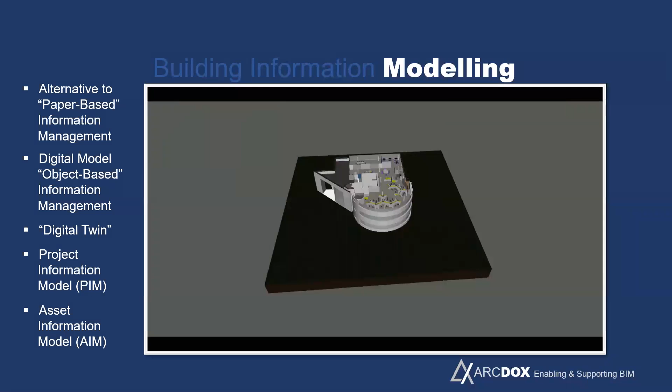So we move on to the next acronym in BIM, modeling. What is this to us? It's the ability to use 3D intelligent objects to build your 3D virtual model, a digital representation of the physical. So the 3D model we have in front of us right now drives the production of your 2D drawings.

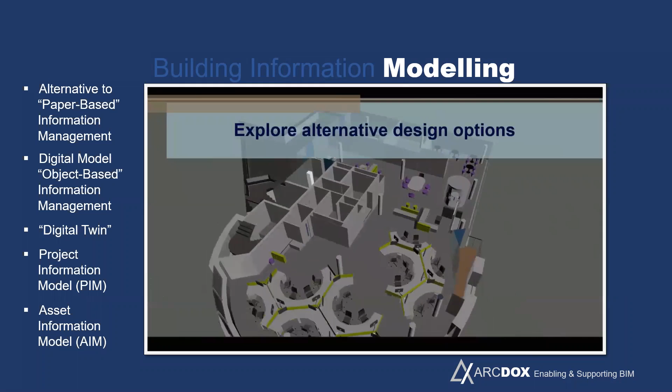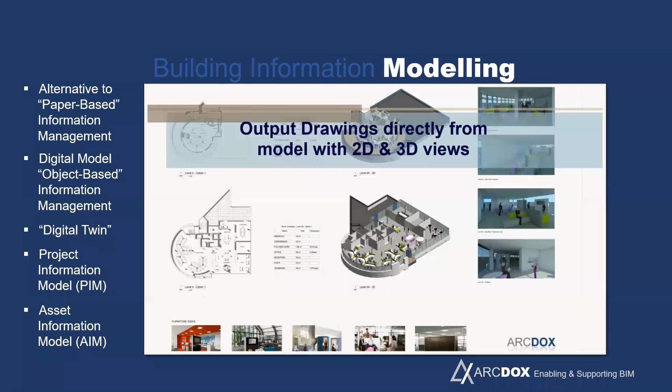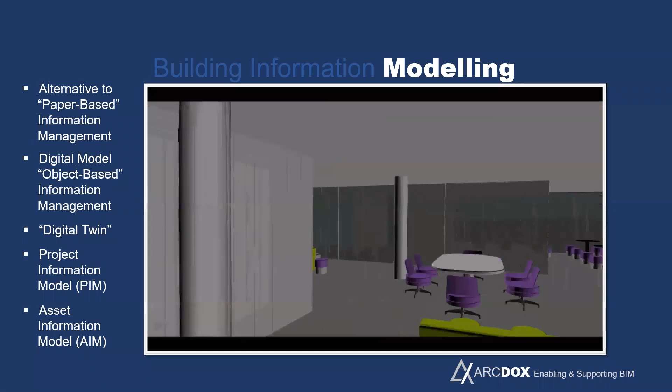It has so many uses. You can exploit it for design options, and for a higher level of communication and collaboration in this environment. These can be called paper-based alternatives to paper-based information management, digital model object-based information, digital twin, project information model at capital delivery phase, and asset information model at operational stage. So it's for better communication and better decision making.

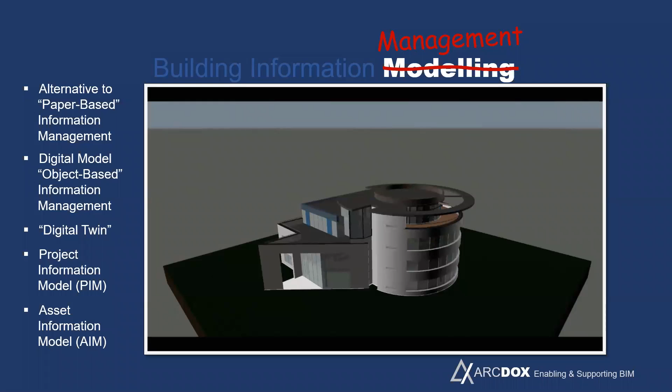The ability to interchange those two words, management sometimes for modeling, is because we want everybody to be able to identify with the BIM process. Taking a construction manager or a quantity surveyor, for instance, they might say, oh, I don't model anything, probably the process is not for me. Well, it's not so. If you could use building information management, then we are all there to manage this information.

So with that said, we take the discussion a little in the direction of our workflows in terms of efficiency and productivity. A workflow with no BIM is when you're describing your building or infrastructure in separate ways. They are separately produced, separately managed. Your 2D documents, drawings, schedules, specifications, are separately produced and separated from one another. The outcome is full of inconsistencies, full of errors and omissions, which could lead to increase in requests for information, and could end up in rework.

So this kind of workflow is outdated in the digital age. We cannot continue to use this kind of workflow. The next workflow we want to talk about, the BIM approach, is likened to a manufacturing-like system, where you describe your building once through intelligent 3D objects that have your design decisions embedded in them. These objects are placeholders for information about the building, used to build your 3D virtual model, which is now the accurate representation of the physical.

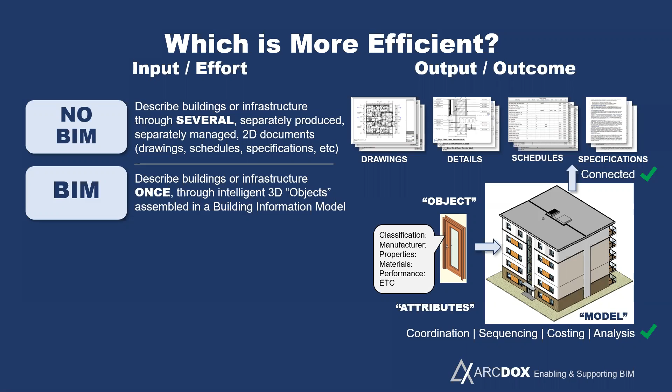Whereas in the first workflow, you have to produce in different places. How about change management? Change management in the BIM approach, when you change once, your change reflects in all other places. But in the very first workflow, you have to go in manually and update your work in different places, and it's full of errors and inconsistency.

The last workflow we'll be talking about is pseudo BIM. This is the least efficient way of working, and it's very prevalent in the industry because people finance or invest in cutting corners. So it's an act of describing your building separately produced, still separately managed, and you now use that information to put up a model.

One thing is the information is still separated from that model. The model is not driving anything there. So those excesses, they are still in that process.

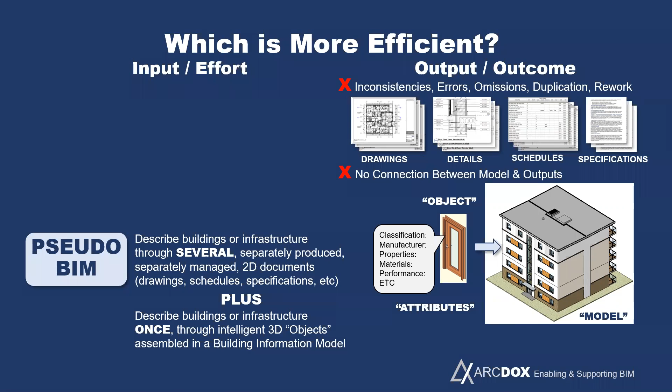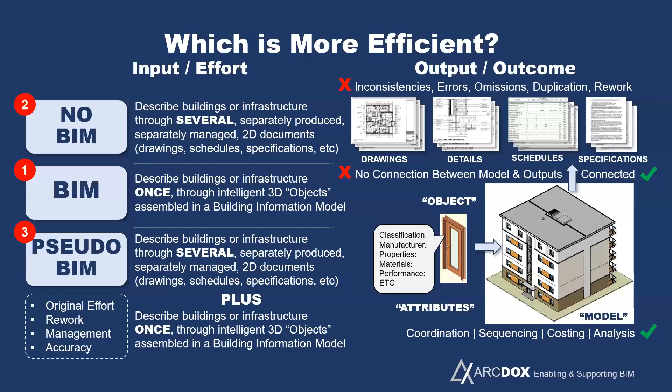So we're going to talk about terminologies a little bit. Level 2 BIM, the uses, dimensions, is very important for BIM managers to be able to delineate between these terminologies. Level 2 BIM is a level of maturity of adoption.

So if you have level 0, you are using CAD, you're not using BIM at all. If you have level 1, you are using the mixed approach that we spoke about earlier on. It's a bit of CAD and a bit of BIM.

If you're using level 2 BIM, it's the ability of different disciplines to come forward. They use the full BIM process to describe, to make their model, and they federate this in one common place, which is your civil site model, architectural, structural model, and even your supplier or services model. But they all come together to form one composite model called a federated model.

The next level of BIM adoption that we have is level 3. We are not there yet. That's working in one particular model, but we're not there yet. So it's level 2 that's being used in the industry as we speak. Bringing all these models into one place is called a federated model.

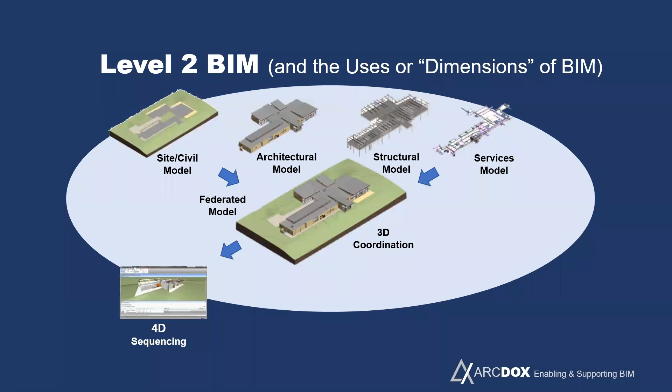It will enable you to do 3D coordination because of the spatial coordination features on the digital objects in this environment. If you plug these objects into your project programming, like Primavera and Microsoft Project, you will be able to establish your 4D sequencing. And if you plug this model into cost information, you'll be able to establish your

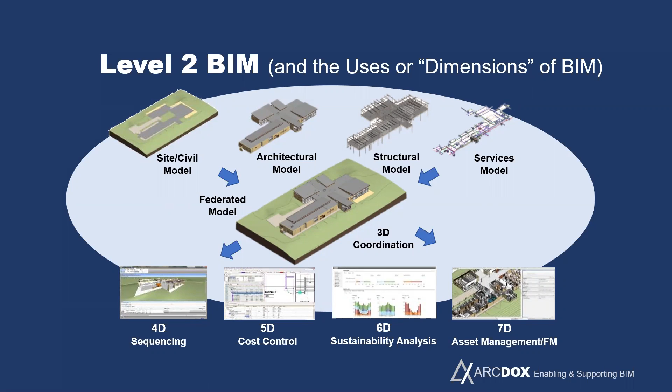cost control or even do your accurate quantity takeoff with all those digital objects. And your performance analysis to really hone down the right design option for that particular project. And 7D is attaching information that will be useful for the facility management operatives to continue to maintain and operate the assets. So it's very important for BIM managers, BIM coordinators, project managers to be able to delineate between uses, dimensions, and level of maturity of adoption within this environment.

So we take our talk in the direction of digital twin. Digitizing and breaking down complex information into minute details is what we are going to be talking about right now. Organizing, helping us to organize the information. So you take your smart city at its highest level, breaking down into complexes.

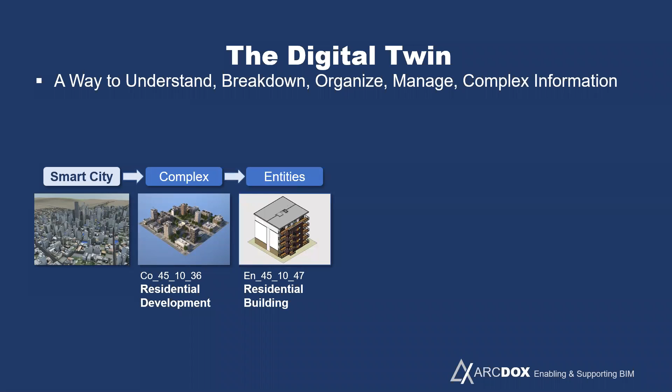Complexes will consist of your campuses, your district, and this can be further subdivided into entities. Entities will become your residential building or sport complex, and that can be further subdivided into elements. Elements, you have your substructure, structure, your facade, external facade, your walls, primary elements of your building. And those can be further subdivided into systems as well, in this case, mechanical extract ventilation system.

And the system will now be subdivided into products to have those components, digital components.

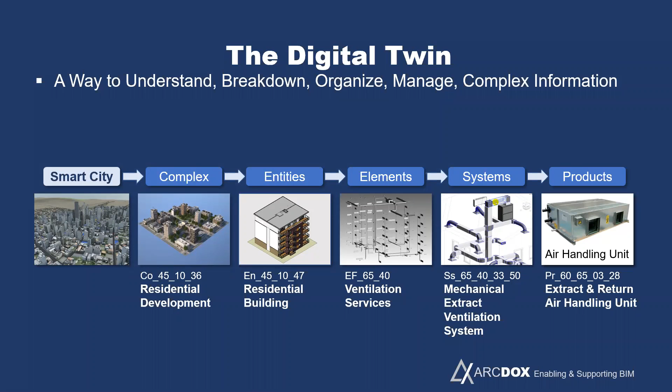What we are seeing right now is giving them common language into common related items. These are physical assets, and you can allocate, they have categorized non-physical items as well with regard to space, locations in the entities, and the activities that occur within those spaces. On the other side, systems and products, you have tools and equipment to maintain products around that area. They have been classified as well.

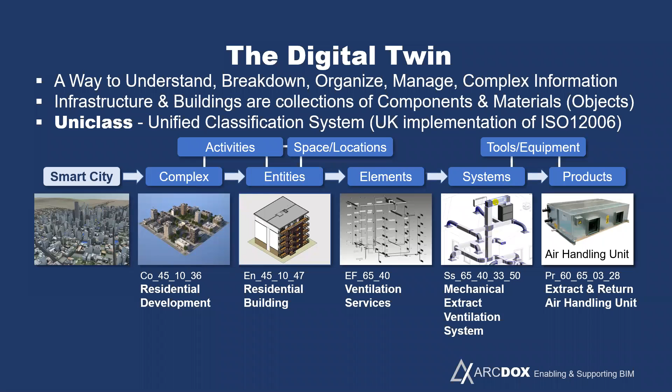So what we have in front of us right now is UniClass. It's called Unified Classification System, the UK implementation of ISO. So UniClass has two parts to it: the machine readable part and the human description. It's basically a dictionary to describe objects in the built environment. That's a link at the bottom left-hand side of the screen if you want to know more about UniClass.

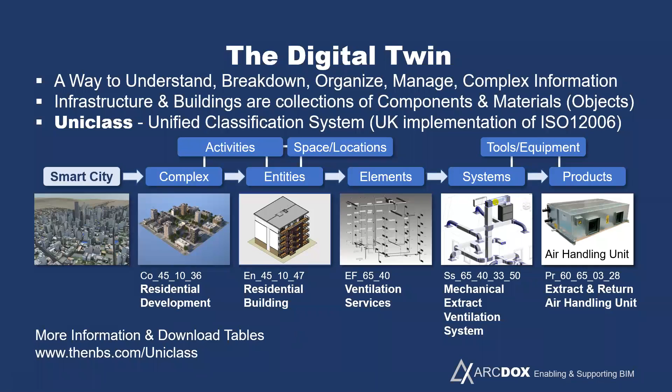Moving on from there, we have digital twin. We're considering product level right now, because if we understand how things are organized at product level, we'll be able to comprehend the elements and the complex part of things. So this is a physical asset with BIM. We want to compare the digital twin of it. The digital twin has 3 types of data.

The very first one is your graphic data. Your graphic data consists of the 3D object itself in terms of geometry, size, shape, the location where the object is within the model, and the connections, which is like an electronic sort of thing that can detect the interface of another system. The next type of data is your non-graphic data, which is a structured one.

UniClass, your manufacturer's details, properties of that object. And the third one is the document. This air handling unit, if it's being produced in the factory, there will be a manual, a quality control sort of thing to show that it's been quality controlled. This is where such documents will reside.

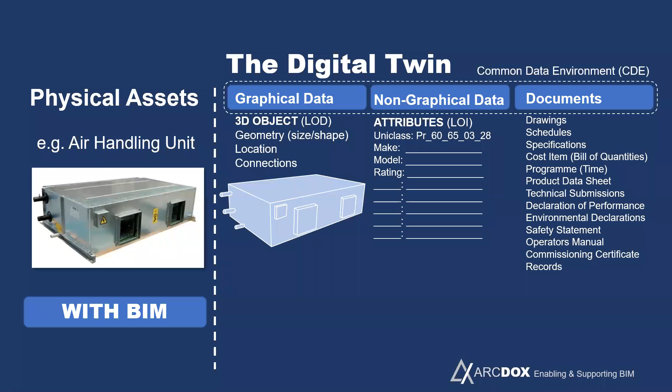All these 3 types of information reside in the common data environment, and it's UniClass that forms the connectivity between the 3 information types. For us to know, from the graphic data you extract your drawings. Your non-graphic data will drop your schedules for you. And then the whole 3D virtual model will be used for 3D coordination because of the spatial coordination features that the digital object has.

And this can go forward establishing your sequencing, logistics, and health and safety procedures, your 5D quantity extraction in terms of cost and quantity takeoff, your performance analysis like energy usage and structural analysis to hone down the best design option, and the information that will be necessary for operation and facility management.

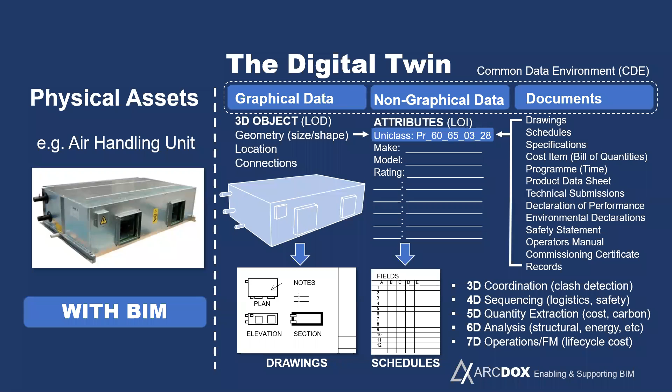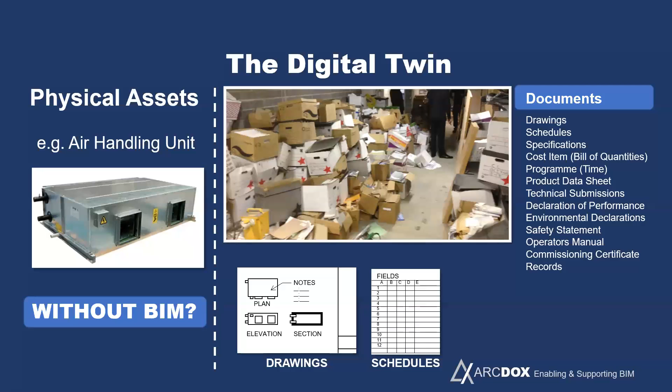It's very important as someone managing information in this environment to be able to delineate between these workflows, between the objects, and to understand how it is organized. This is at product level, and it's the same thing across the board. So we are looking at this physical asset without BIM. The information we looked at earlier, this is the kind of drawings and schedules it will drop, if they are produced separately from one another.

Then we want to ask ourselves, what do clients really want? What are they really looking for? What are they building? Their needs? Will their building match their image? We want to know that clients want scope, time, cost, and in the center of it all, they want quality and value.

So then how can BIM offer them all this? Considering 3D BIM, because of the 3D visualization we can do in this environment, people finding it difficult to read 2D drawings can be part of this because you can feel the building, they can see the project scheme coming alive right in front of them. Thereby it establishes a project scope and supports certainty, taking the risk out to manage it effectively.

Moving on from there, the same model is used for 4D BIM when the element of time is added to it. When the element of cost is added, you get your 5D BIM. When you use your performance analysis, you can hone down the performance to change the design iteration to suit. And for 7D, for the maintenance and operation of that facility to continue, there is information attached to the BIM object.

So what clients are looking for is better buildings to be built quicker and built in a cheaper way too. The UK 2025 construction strategy states that they want 50% better built, 50% to be built quicker, and 33% to be built cheaper. So touching on from there, we move on to is your career, is your business.

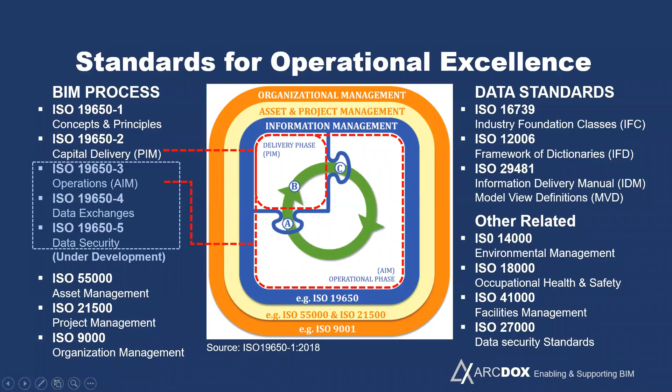So then the project management process, very quickly, as a high-level summary: you need your ISO 19650 to manage information in the capital delivery phase. Getting your team together is very important, and making sure that they have BIM capability, that they can use the BIM authoring tool, do BIM coordination, and all that.

Then the next one is your employer exchange information requirements. Most employers don't know how to even put this document together, so it's the responsibility of people in the sector as information managers to come alongside the client to help them develop this document. The next bit is the commercial arrangement, the BIM protocol for every team on board, scope of services for information management, appointment of information management at design stage and construction stage. How about the PI insurance needing to be catered for?

Digital plan of work as well. We cannot say we are building virtually, and we won't use the digital plan of work. We have to use it.

And the next bit is the BIM execution plan before contract. It's a response to what an employer is looking for, answers to how you are going to build what the employer is looking for. And at this time you have to prove your IT infrastructure capability, that you are able to do that.